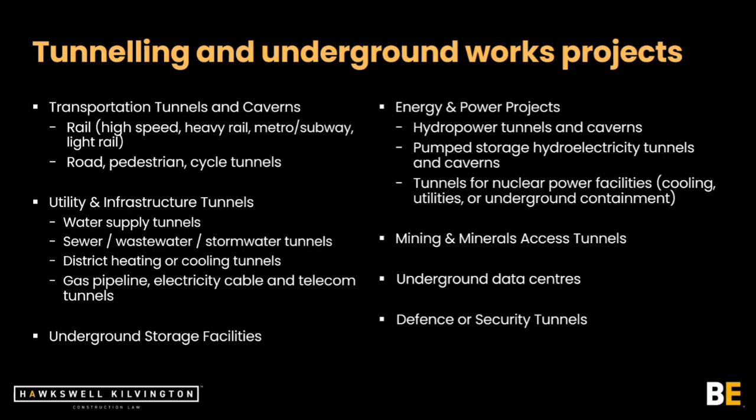Now, when I was preparing the contracting practices paper, I came up with a slightly different, refined version of this, and I've added two more. One is function, and the other is safety. And this very much illustrates one of the features of tunneling projects and why procurement decisions become so important. When I talk about function, what I mean is, does it stand up?

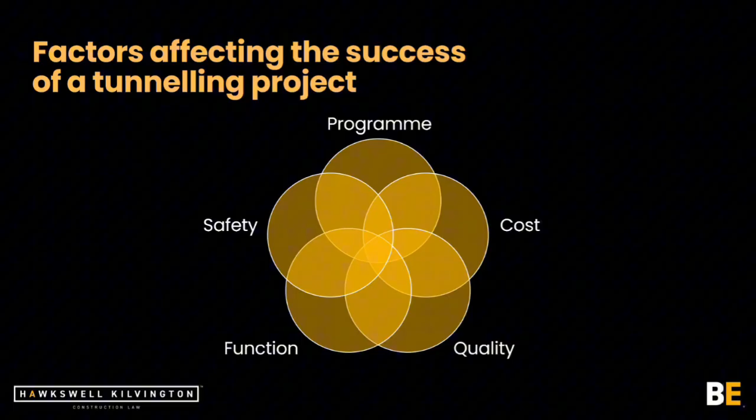Quite simply, because as we'll hear later, many of the procurement practices that are being adopted nowadays were driven by the insurance industry back in the late 90s and early 2000s, when there were issues about risk management and losses that were being incurred under CAR policies. And safety is also equally, if not more important, because a lot of the underground subsurface work is done in, I won't necessarily say dangerous environments, but more dangerous environments than many of the above ground projects.

Then when we think about success, it's also important to recognize that the different participants in the projects have different ideas of what success means. Now, for an employer, it's about obtaining the asset, getting what is to be built within their budget in the time it requires. And I've added maintaining reputation.

Because as we've seen, there has been a history of tunneling projects getting a bad reputation, which is reflected on employers due to the issues that are involved. And you only need to think about the headlines over the last 20 years. When we think about the Boston Big Dig, HS2, Snowy 2, all of these things become very important for the reputation of the employer.

Now, from a contractor's perspective, it's about performing the works at a profit, because they're not charities, and also maintaining their reputation. Now, the funder or the sources of funding is slightly different. Obviously, many tunneling projects are public, but when they are private or privately funded projects, they're looking for returns on their investment. And insurers, which play an important part, are looking for the projects to be completed with the claim activity within an expected range. Now, all of these factors feed into procurement decisions.

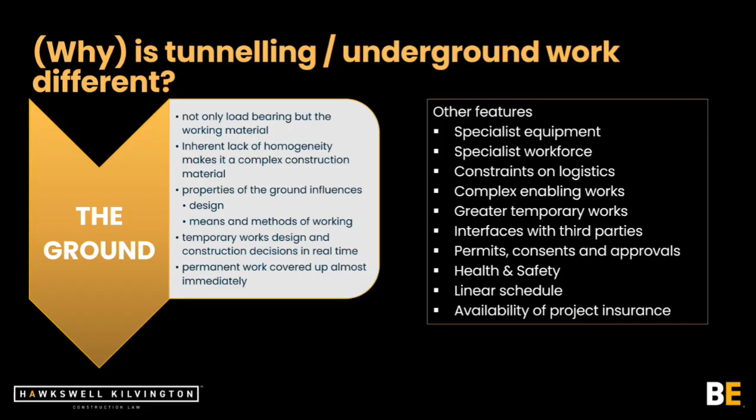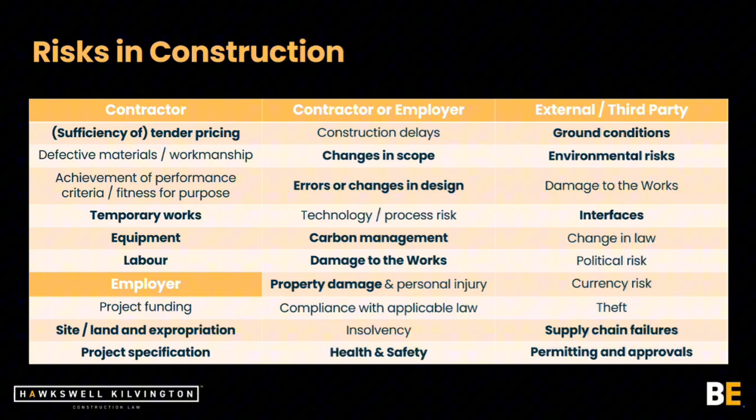You'll also hear tunneling projects being described as linear. Now, when I think about this, on paper, yes, that may be true because tunnels start from one end and they'll go to another. But I think that is probably an oversimplification. Actually, it's more appropriate to be thinking about it in a way that the progress of a tunneling project can be disproportionately impacted in terms of the critical path by unexpected conditions encountered during construction. And when progress stops, it really stops. There's no just slowing down. It's a complete stop. Now that, of course, comes with some significant and direct cost implications. So when we're looking back at the risks in construction, I've highlighted here some of the issues that are particularly more relevant to tunneling projects.

Now, when we think about tunneling and insurance, back in the late 1990s and early 2000s, we got to, I won't necessarily say a crisis, but a critical point. And this was where it was commonly known that insurers were questioning whether it was sustainable to continue to insure tunneling projects. And the issue was that there were a lot of losses. I'm not necessarily talking about the extreme situations of tunnel collapses, but there were a lot of losses, issues in relation to water ingress, minor collapses, losses within the tunnel, which led to the preparation of codes of practice on risk management for the purpose of the insurance industry.

Initially, this was produced jointly by the British Tunnelling Society in the UK with the insurers. And then subsequently, an international version was produced, and we're now on the 3rd edition. And the objective here is to promote and secure best practice for the minimisation and management of risks associated with design and construction of tunnel works.

And what the Code of Practice does is it produces a framework from project development to construction about identifying and assessing risk throughout these processes, and preparing risk registers and risk management plans. In the design phase, it's very much looking at constructability. And then in the construction stage, it's looking at method statements and the ways in which we can mitigate it.

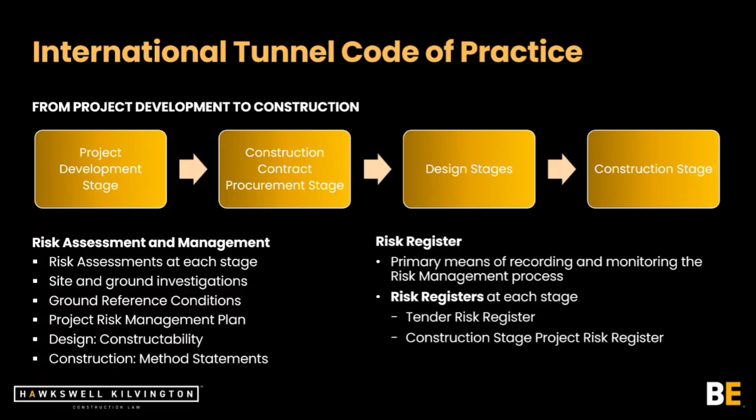Now, you might be thinking why I keep going on about insurance, but obviously because of the risks involved and the potential losses that may be incurred both to the works and to third parties in tunneling projects, insurability becomes a key issue. And the Code of Practice has introduced a discipline in terms of risk management.

Now, in terms of tunnel procurement itself and decision making, it should be obvious that it involves a number of different key decisions. For the simplest of projects, it's fair to say that the procurement may be relatively simple. Where the work is being procured on a single contract and the ground is known, apart from having to deal with some specific subsurface conditions in the contract itself, the procurement process can be relatively straightforward.

But more generally, as we've been mentioning, these projects involve a lot of interfaces, third parties, variables, constraints, and uncertainty. I'm not necessarily saying these projects are unique in themselves, but they are unique in the combination of the issues and in the magnitude in which these decisions can affect the ultimate success of the project.

Now, the first one is the very obvious point about defining the project. It's about defining the function of what is being built, its location, the completion date, and the cost parameters. The next one is about identifying the risks. This extends beyond simply site conditions into planning consents required, and also the third-party interfaces and working out where those constraints are.

Another decision that needs to be made is about the packaging strategy. Again, in the simplest contracts, you will have one contractor who will do all of the work. But more complex projects will often involve multiple different contractors or multiple different suppliers. For example, in metros, the tunneling contractors will often be interfacing with the station contractors, and so there'll be an interface at those ends.

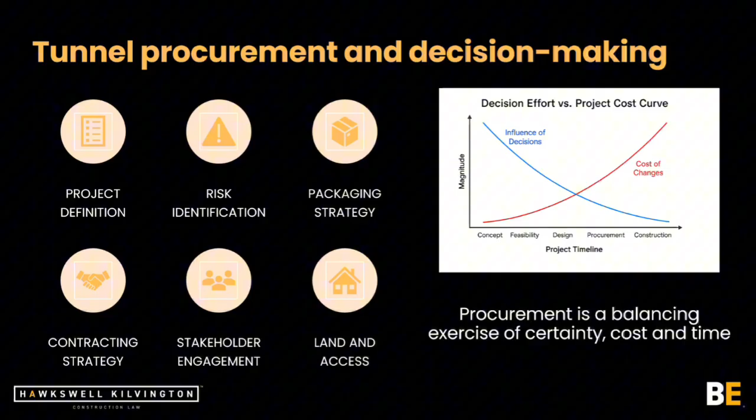And procurement very much is a balancing exercise about understanding certainty of the risks and then cost and time. And time is not just about time in the contract, but time in the overall project timeline. Now, one very critical feature is the design phases. From here, there are many different phases.

You will start with feasibility, go through to concept, the preliminary design, then we often produce reference designs, and then detailed designs. Depending on the contracting strategy will depend the level of design maturity that is needed before going to tender.

With a design build approach, we're normally at a preliminary or reference design being produced by the employer, which the contractor will then pick up. In a design bid build or an employer design approach, the design will have to be more detailed in order to define the scope and to avoid issues of scope creep later.

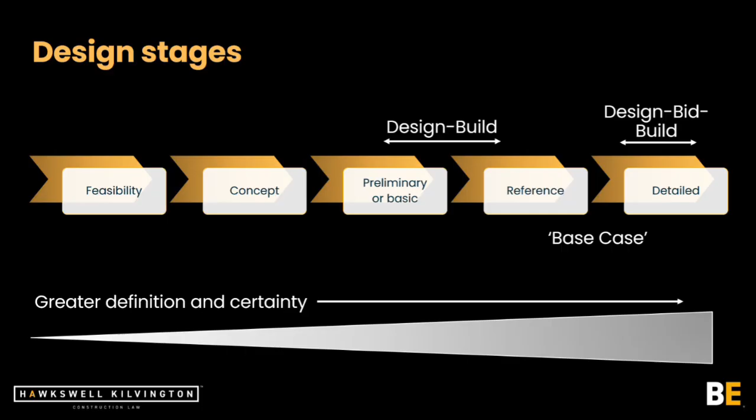I've introduced this idea of base case to pick up a little bit later. But going from left to right over this chart, you have greater definition in time, greater definition of the design and greater certainty. But what is the role of design and why is it important?

Now, here you go, is a bit of a spider chart. This is what my head looks like when I'm thinking about these things. Now, in the middle of this is the design. That design includes the various different stages that we've had in the previous slide. But what you can see from that is how the design in tunneling projects is influenced by and influences multiple different factors, and they are all interrelated.

You've got issues of the ground investigations, which will inform the ground conditions and the knowledge of the ground conditions, and then the geotechnical baseline report if you use it. The ground conditions will influence the design and the design methodology, which will then go to construction methods and the labor requirements and equipment requirements and issues of buildability. The design will identify the alignment, which will then lead into issues of access arrangements, etc.

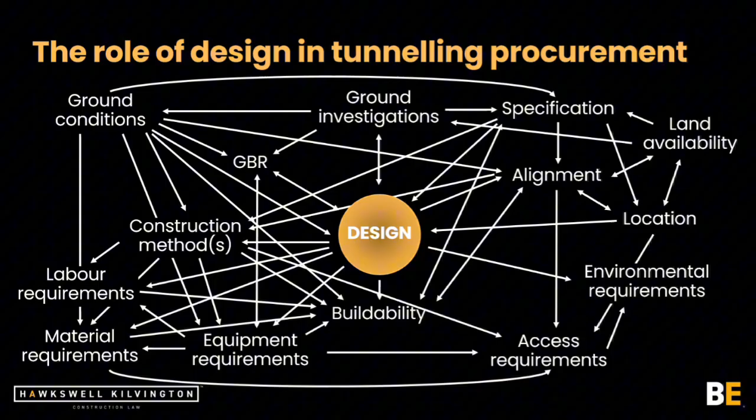It's complicated. And really what we're trying to do as part of this procurement process is to understand all of these interfaces to an appropriate degree in order to then procure it through a contract and move to the contract phase. Now, the other issue, in addition to design, that is as important, if not more important, is the question of ground conditions.

Now, the ground conditions themselves, as I mentioned before, are fundamentally important because they are the working material, and the ground conditions will influence the tunnel design and the method selection. There are innumerable construction methodologies in tunneling, from using TBMs all the way down to basic mining. And the different grounds will point towards different methodologies. Now that in itself will then lead us into questions of cost, safety and program.

Now, subsurface uncertainty, as you all know, is the leading cause of delays and claims. As I mentioned earlier, claims are not necessarily a bad thing when you're allocating risk, but they are claims and need to be resolved. And then if not resolved, they'll go into disputes. And this all arises around unforeseen ground conditions.

Now, if you do encounter unforeseen ground conditions, it's not just a simple question that it's going to take a bit more time or a bit more work. It can actually cause deviations from planned tunnel design and methods and require you to go back to the drawing board. So it's not only a question of delays in terms of the construction, but actually requires the parties and the contractor to go back and have a look at the design itself.

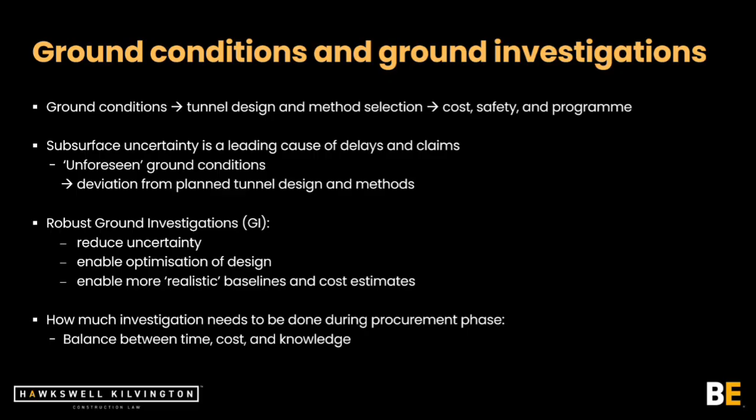There are certain geographical locations where the ground conditions are relatively well known, for example, in London or in Hong Kong, but even in Crossrail, which was, for those who don't know, a tunnelling project across London, hundreds of millions, I believe, was spent on ground investigations in order to reduce the uncertainty. But ultimately, it becomes a question of balance, a balance of time, cost, and knowledge.

Because the understanding of the ground conditions leads into the question about the allocation of ground condition risk. Now, this is achieved either through the design, the selection of the pricing mechanisms, or more commonly, in addition to those two other methods, through adverse site conditions clauses or differing site conditions clauses, the classic clause 12. Now, the starting point, as everyone will probably know, certainly under common law, under English law, is the ground conditions are the contractor's risk unless the contract provides otherwise.

And as a result of that, we've seen development of different approaches, different mechanisms that are being used contractually. FIDIC and the ICE form use this idea of foreseeability, whether or not the ground conditions were reasonably foreseeable by an experienced contractor. NEC forms use a slightly different approach, which is what I would describe as a probabilistic or commercial approach. The US adopts this material difference test.

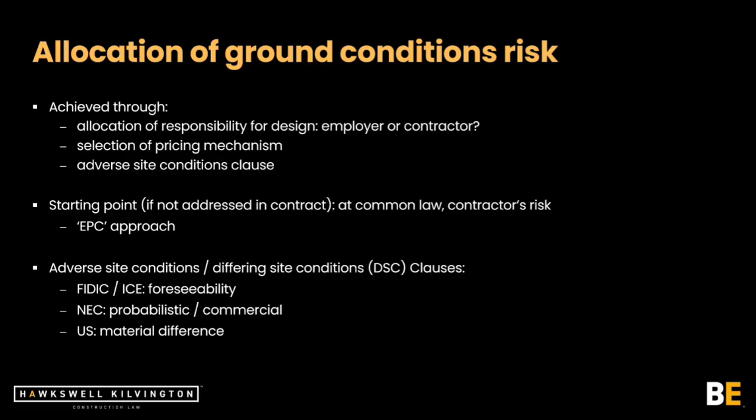Now, the issue with each of these tests is, well, what do you mean by reasonably foreseeable? What do you mean by such a small chance that someone would not have taken it into account, or a material difference? Now, this is where you have a lot of disputes. And so as a result of that, best practice, at least, has adopted the use of geotechnical baseline reports. Now, these are contractual documents.

They're not factual descriptions, and they define what ground conditions risks are assumed by a contractor. They're not necessarily the actual ground conditions, but it's assumed contractually. In effect, they define what is foreseeable. And it contains baseline statements with physical conditions, which is the ground conditions, but also the behavioural conditions, because you need to be able to assess not only whether the ground conditions are not what you expect, but whether it's having an impact on the design methodologies in the construction.

Now, GBRs have been endorsed for the tunnelling industry since the 1970s. But with that said, there is a mixed experience in them, because it very much depends on the quality of the authors and the quality of the report. They need to align with other contract documents. And also, they need to be prepared on the basis of sufficient information, a sufficient level of design maturity, but also questions as to methodology.

This in itself gives rise to issues in relation to timings between design bid build and design build, because in order to identify proper behavioural conditions, as I said, you need to have the design developed to a certain stage. But in established practice in, for example, design build, the design will not be developed. It may only be a basic preliminary or concept design or a reference design at that stage, with the expectation that the contractor is going to be involved in the detailed design, which in itself will go forward into the construction methodology.

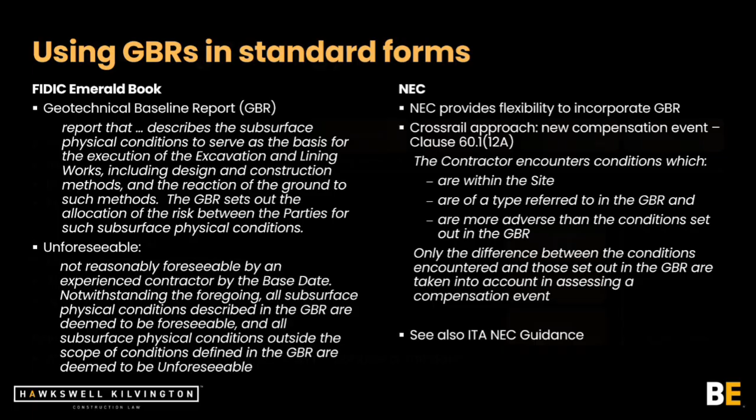But the key considerations when we're thinking about contracting strategy are also market practice and conditions, what the contractor is willing to accept, what the supply chain is willing to accept. So it's all very well the employer, the client, coming up with an idea that it wants to produce this on the basis of a lump sum, but if the market is not willing to accept that, you're not going to get any bids. It needs to be aligned with the other procurement decisions.

And it also will influence and can be influenced by procurement questions as to speed to site and speed to contract. Now, you'll commonly hear, when we're talking about tunneling contracts, this idea of fairness or balanced contracts and the Abrahamson principles going back to 1973. In simple terms, this is about the allocation of risk to the party that is in the best position to manage or mitigate that risk. It's a very simple term.

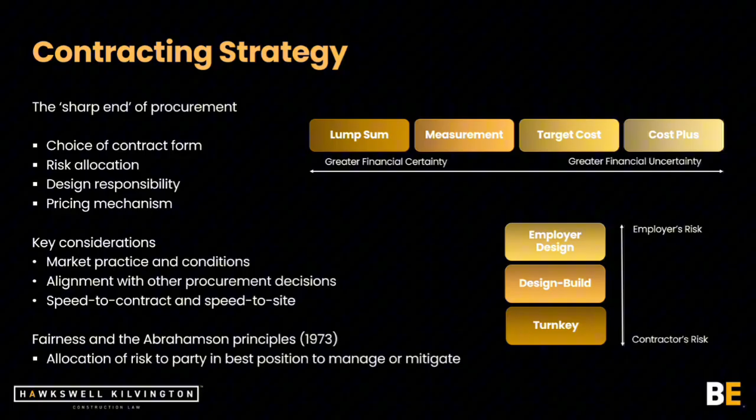And there are numerous forms of contracts, and I don't really want to go into them in too much detail. The main point is it's very much market driven. The standard practice in the UK is NEC; internationally, at least from a non-jurisdictional point of view, it's FIDIC, but most jurisdictions will often use their own contract and amend them to a greater or lesser extent to adapt to the greater involvement of subsurface works.

Now, I mentioned the FIDIC Emerald Book. This is the conditions of contract for underground works. It was a joint endeavour by FIDIC and the International Tunnelling Association, published back in 2019. There's been one set of amendments that was produced in 2023, and this picks up on some largely typographical points in the 2019 edition, but also picks up on some issues that were present in the 2017 issue of the FIDIC Yellow Book, the design build form that was the basis used for the Emerald Book.

It's based on this fundamental principle of a balanced risk allocation that I mentioned, going back to the Abrahamson principles. And ostensibly, it's a design build form, as is the Yellow Book, although there is a curious addition which talks about except as otherwise specified in the employer's requirements. As I've mentioned, it adopted a geotechnical baseline report, and also, more interestingly, a hybrid pricing mechanism, which I will touch on in a moment, and a mechanism for adjusting the time for completion. There are other changes introduced to tailor it specifically to the nature of the work, and also the issue of risk management, going back to the code of practice with the insurers, such as risk registers and risk management.

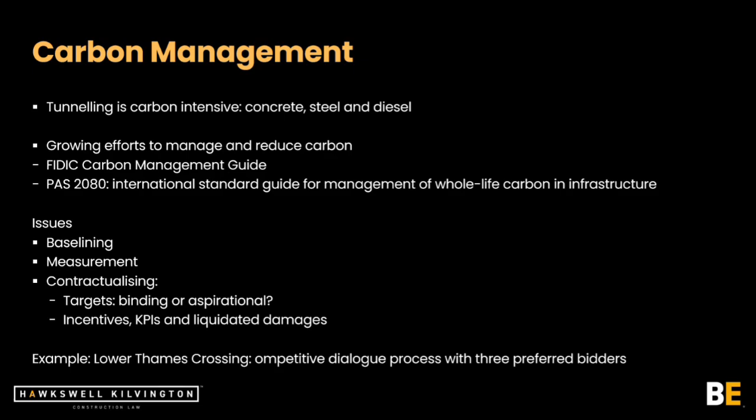And the results of that have been very significant. I think the latest prediction is that they're now down to about 1/3 of what was initially estimated. And again, that's an early engagement with contractors and with the industry to understand where these things can be achieved.

Now, to conclude, and I'm slightly over my 45 minutes, and I apologise, tunnelling projects themselves are susceptible to cost overruns and delays due to their nature. I could have spent the last 45 minutes talking about all of the different headlines. But many of the reasons why you have cost overruns and issues is through decisions that were made at the procurement stage. And that's not only about the choice of contract and the contracting strategy.

Now, some of these are very macro issues. These are issues in relation to interfaces, land, and in many of the examples I've mentioned today, a lot of it's about public reception and political issues, which is, I would say, to some extent inescapable, but needs to be factored into the way in which we communicate the success of these projects.

Now, in procurement, adequate ground investigation is essential, and as importantly, all the other risks need to be understood, and time and cost need to be involved in that. It's challenging, but not impossible. This is where I come up with the maxim: plan slow, build fast. It's about being flexible. There isn't a one size fits all. It's about thinking about your specific project, being informed as to the decisions that need to be made, and being engaged with the market in order to maximize and optimize.